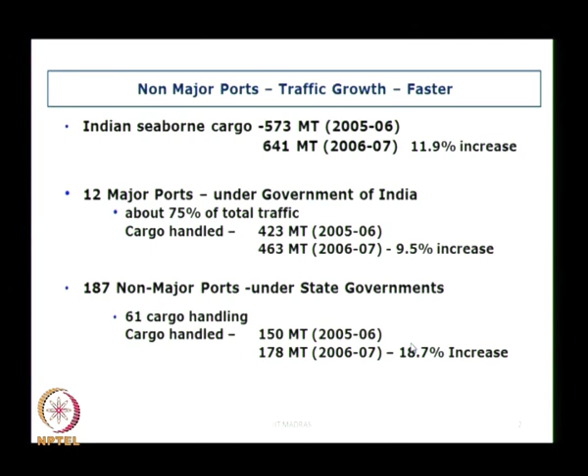and there the cargo is increased from 150 million tons to 178, that is about 18.7%. It is almost double that of the major ports. This trend is continuing. If you see the share of the maritime states, I said in the first class that there are about 9 maritime states.

There is no surprise that these 3 states, Gujarat, Maharashtra and Tamil Nadu, are the 3 major states that are handling the maximum cargo. If you see the living style of people in all these 3 states, they are much higher than other states. AP is fast catching up, they will come very close to Tamil Nadu. So these 4 major states are handling the maximum amount of cargo.

West Bengal is only 9%, Goa is 7%. Though Goa is a very small state, its handling capacity is comparable because of the location of Mormugao port as well as the hinterland it has. Karnataka 6%, Orissa 6%, others are about 3%. This is what it shows. I will be concentrating on Orissa just to give the reasons why it is not comparable.

The reason for Gujarat is obvious. We have 2 gulfs, Gulf of Kutch and Gulf of Cambay. The industrial policy of Gujarat government is also very good. Basically the Gujarat people are businessmen.

Anybody from Gujarat here? I do not expect anybody. I think most of you may be from Tamil Nadu and Andhra Pradesh because of the location of IIT Madras, but in Gujarat the people are businessmen, they may study MBA, not engineering.

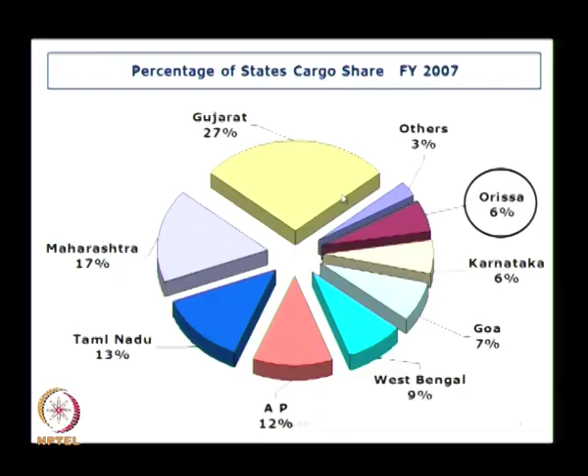So in these 9 maritime states we have, in financial year 2007, 663 million tons. The Ministry of Surface Transport, now the Ministry of Shipping, has forecast about 2000 million tons in 2017, but because of the economic recession this 2017 may go to 2020. From 663 in 2007, in 2011 we are handling very close to 1 billion tons, that is 1000 million tons.

Just like Goa, Orissa is also having rich mineral resources and is also now undergoing rapid industrialization. So it can expect about 1/6 of the national cargo, that means 15%, and we have about 480 kilometers of coast in Orissa. Tamil Nadu is about 600 or slightly more kilometers, but out of this only 50% is available for port development. The purpose of this slide is to show the advantage of a cluster of ports.

If you see Tamil Nadu, near Chennai we have 3 ports: one is Chennai, another is Ennore, the third one is L&T. There are some advantages of a cluster of ports, so we need to have a cluster of ports. We are suggesting about 3 clusters of ports. The advantage is the rail and road connectivity. If you have a cluster of ports, then the rail and road connectivity can be common for one cluster, so the development cost can be shared.

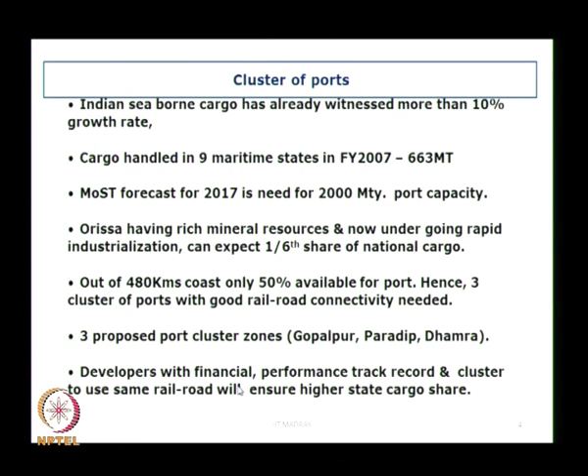So this is your Orissa coastline starting from very close to Andhra border. This place is called as Sonapur. It goes all along this; we call it as first cluster, Gopalpur cluster. We are calling this as Gopalpur cluster because already the approval has been obtained for Gopalpur, the construction is going on.

The next cluster is between these 2 locations, that is there is a river Devi coming here, from Devi to Dhamra. The third cluster is from Dhamra to, the coastline goes like this, where Chandipur is a place where we have this DRDO and other establishments using the sea coast. This portion is very calm area, is very good, not only in the Indian context, in the international context. It goes up to the West Bengal border.

These are the 3 stretches what we want to develop, and each stretch we are showing where the cargo is coming, and this shows the railway line. What you are seeing is the main railway line which goes all along the border.

This Gopalpur cluster, the details are given. What is the coastal length? 235 kilometers. There is an environmental restriction. This point is very important. Whenever we talk about port development, this environmental restriction is the one which governs whether a port can be developed or not.

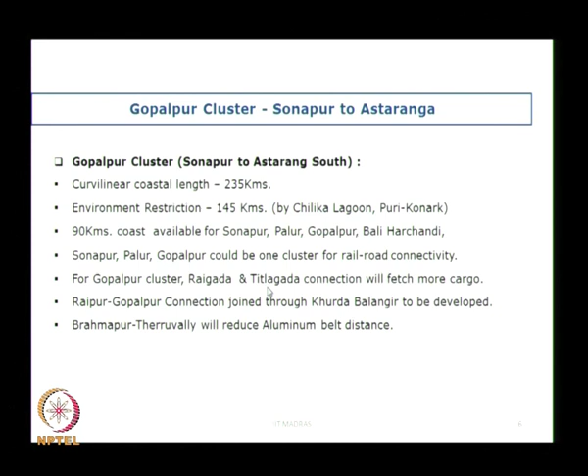Chilika lagoon is a wetland, so if we develop any port it will affect the coastal inlet. So out of 235 kilometers, 145 kilometers we cannot develop, only 90 kilometers can develop. Only 3 places we can develop, one is Sonapur, another is Palur, and the third one is Gopalpur. And this gives some details about the connection. I will not go into detail; unless you know the geography and the details, it is very difficult for you to understand.

There is a river called as Rushikulya river which is draining into the sea, and this is that stretch Sonapur up to this place called as Astarang, where there is a river Devi which is draining into this. So we are discussing about Puri, Puri is somewhere here, the Konark is somewhere here. So this area becomes really very sensitive, and I was talking about the Chilika lake. The length is around 60 kilometer, the maximum width is 20 kilometers. What you are seeing here, the blue color, this line is your Chilika lake. So this Chilika lagoon ecosystem we cannot develop.

Then we have olive ridley turtles that come and nest by the side of Rushikulya river, here also you cannot develop. So there are certain stretches, this should have been given in a red color, but this place and this place you cannot develop. There is one place in between this at a distance of more than 10 kilometers, Harichandi, where you can develop. Then we can develop a place called Palur. It is possible, but not very economical. Gopalpur already developed. The other potential location is Sonapur, which also can be used for development.

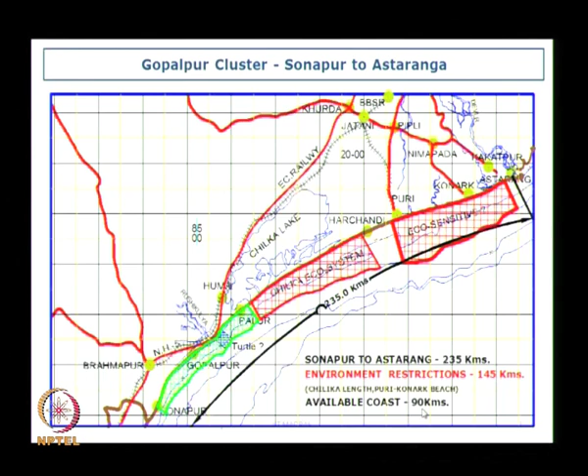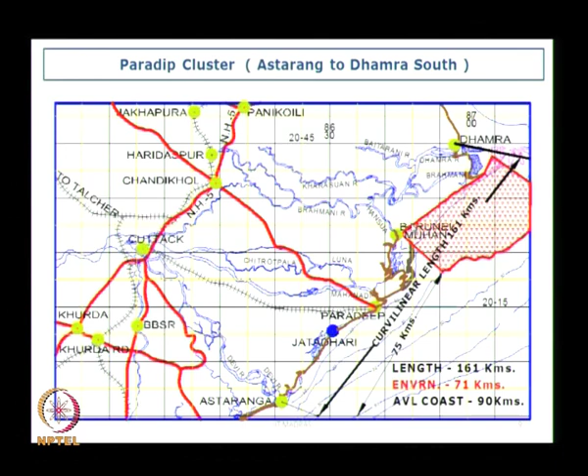Then we have this Paradip cluster. So, this area also is very sensitive area, so we cannot develop here, and we have a place called Dhamra where the river is draining. This area also is a very sensitive area for our Indian Navy. There are certain establishments where we cannot develop, so only Dhamra we can develop.

Then we have the other cluster. This is the Dhamra port, starting from Dhamra to West Bengal border. This is the third cluster where we have this portion shown here, which is your environmentally sensitive area. I am sorry, it is not environmental, it is defense. They have some restrictions. They are doing some operations here. They do not permit any commercial activity in this.

What you are seeing here, this red color is your 10 meter contour, this blue color is the 20 meter contour, and this is about 30 meter contour, and here we have developed the Dhamra port.

So, just below this defense restricted area there is a place called Chudamani where you can develop. North of this, where we have the river mouth, the Subarnarekha mouth, we can develop a port called Kirtania. There is one more port planned on the other side of the river. So, these are the three clusters.

The distance from Dhamra to Kirtania is 84 kilometers, out of which the defense restriction is 45, and the available coast is only 39 kilometers. This railway line, which is connecting to the main railway line, is being laid for the Dhamra port.

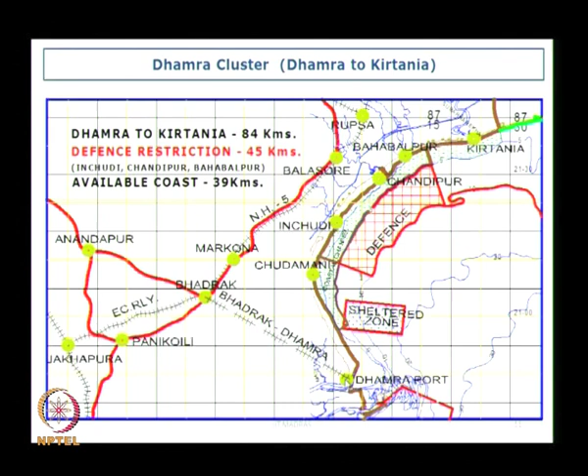So, what is the cargo share that has to come to Orissa? It is given as 2017, but we will make it 2020. You have to see this in context: in 2011 we had about 1 billion tons, and that will increase in another 9 or 10 years by another 1 billion tons. From independence in 1947 to 2011 we slowly increased to 1 billion tons. From 2011 to 2020 it may go to 2 billion tons.

This shows how fast the development will take place and what the requirements are for port industries. One of the spin-offs of any port development is hinterland development. When the hinterland develops it needs a port, and vice versa, when a port develops the hinterland also develops.

So, we have 1/6 of the share, about 330 million tons, that is to be given. Paradip is the biggest major port and Dhamra is the largest minor port of Orissa. With projection this may go to 160 million tons, and we need another 15 ports of 10 to 15 million tons capacity. At Chudamani they are planning about 10 million tons.

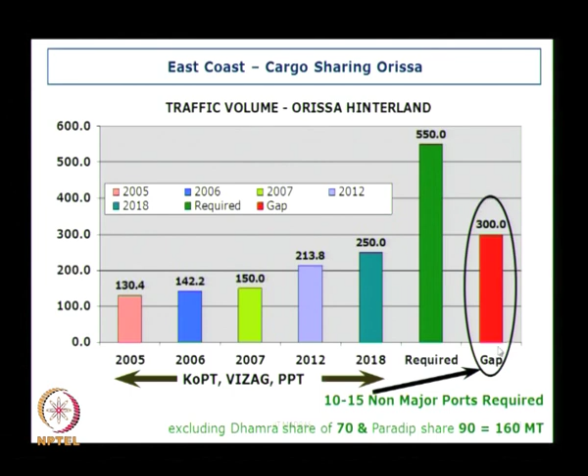So to sum up, we need about 300 million tons. The existing major ports are handling about 40-50 million tons, and it can go to 100 million tons. But the minor ports they want to develop in future cannot be of very small size; they have to be of considerable size, at least a minimum of 10 million tons handled by any port. That means about 10 to 15 ports should be developed.

So the state share has to increase from the current 6% to 16%; only then will Orissa state get developed. The ports are required to be developed on a priority basis. State development earlier was all based on agriculture and mineral resources, but today, in the context of imports, exports and globalization, port development is one of the vital parameters. Once the port develops, the state also develops.

We have a terminology called captive and non-captive port. A captive port is for an industry: the Birla Group wants to develop a port at Chudamani that they will use only for their industries; they will not handle cargo for others. Chennai port is a non-captive port in the public sector, so it handles cargo for many industries, whereas a captive port handles only its own industries. One captive port for Reliance is in Jamnagar, used only for the refineries.

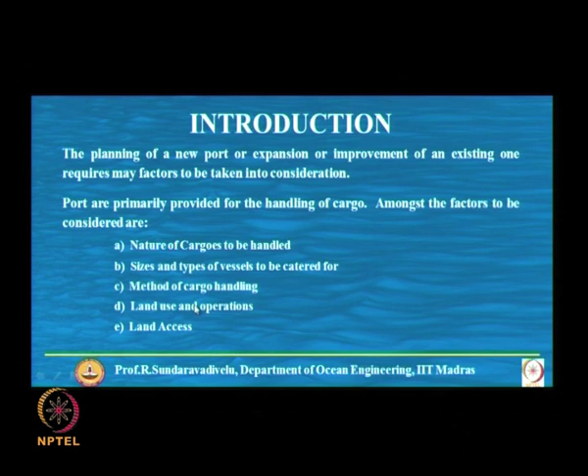So we are explaining the nature of cargoes. General cargoes are non-unitized cargoes, break bulk cargoes. Break bulk means steel, finished products. Unitized cargo means it can be in a container or things like that. Bulk cargoes, as we already told, can be dry cargo or wet cargo, that is liquid cargo. The handling method is different for different types of cargoes.

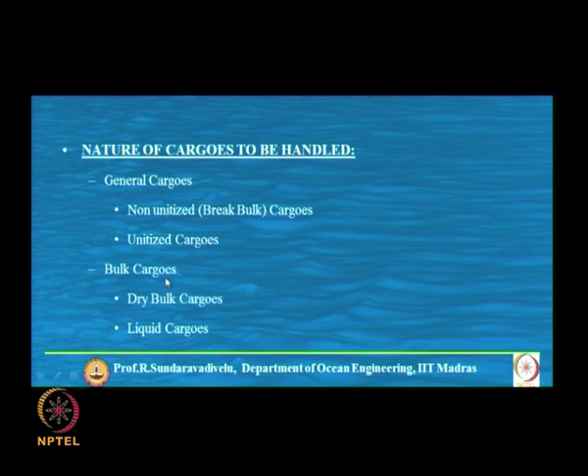The types of vessel you handle can be classified into 5 different types. General cargo vessel, container vessel. Roll on roll off vessel means at the end of the vessel you will have a ramp, used especially for taking cars. Then we have bulk cargo vessels where we transport iron ore and coal. Then we have tankers, clean and dirty cargo. Dirty cargo is crude oil and clean cargo is products.

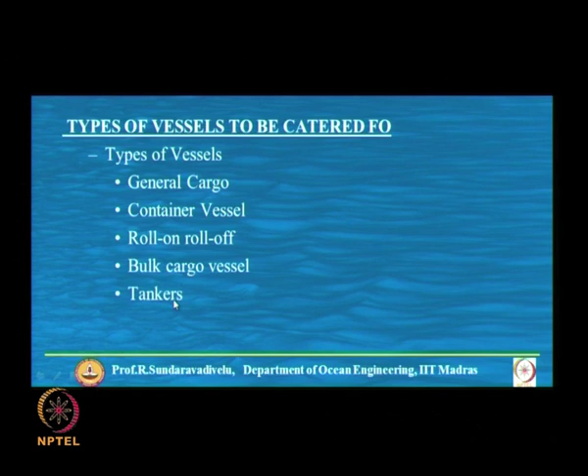One of the main features of this course is how to design the structures, whether a breakwater or a berthing structure, for which these vessel characteristics are very important. The layout of the ship, including locations and dimensions of the ramps and hatches. Hatches: last class I told about bulkheads. Each bulkhead is covered by a hatch cover. The location of the hatches is important.

The loaded and unloaded deck heights, that is the freeboard when loaded and unloaded, superstructure positions and clearances for dockside cranes. When it is completely unloaded, the ship will be above, so if it is rolling, it may hit the dockside crane. So the crane rail minimum specified in our code is 2.65 meters from the face of the berth. Only there can you have the rail for the crane.

Then we need to see the handling characteristics of the ship, how you handle the ship. For maneuvering, meaning stopping distance, going through the entrance channel, and turning operations, that is how you turn the vessel in the turning circle. Some ships nowadays have good maneuverability, even without tugs they can be maneuvered; otherwise we need a tug to maneuver the ship.

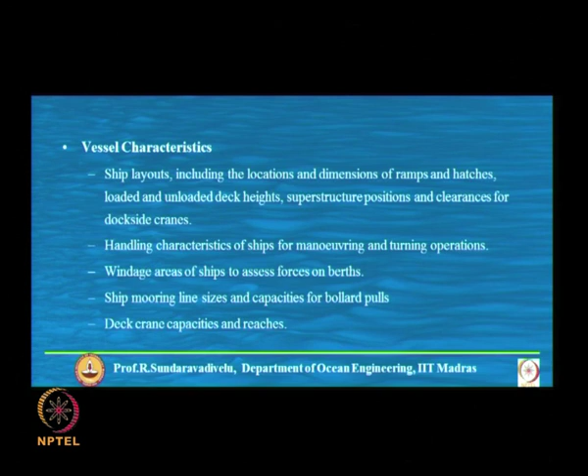The method of cargo handling. So the cargo handling depends on the nature of cargoes and the type of the vessels likely to use the port. The most important consideration is whether dockside cranes are required or whether ship's own lifting gear will be used for loading and unloading. So I said last class about the handy size and handy max which are having their own gear, so we do not need a dockside crane.

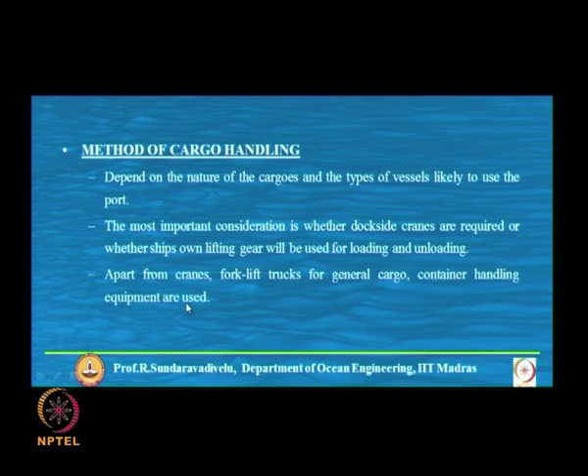These own lifting gear ships are very much important in the Indian context. All along the coast every 50 kilometer you can have a small berthing facility where the small ships with their own gear will come and load and unload the cargo. Apart from these cranes we need forklift trucks for general cargo, and container handling equipments are also used inside the storage area.

This land area is also important. It depends on the throughput of the cargo, how much land is required behind the berth, the type of cargo, the methods of cargo handling, and length of time cargo remains in the port. This length of time cargo remains in the port is very important. We do not want the cargo to be in the port for a very long period of time.

The container berth generally requires more land behind the berth to maximize the throughput. With the general cargo, part of the land will be utilized for transit sheds and warehousing. This is also important because general cargo, unlike container, cannot be immediately transported, so we need a transit shed as well as the warehousing. For container cargo, the land area can be open because containers give the cover against rain and sun, whereas for general cargo we have to provide transit shed and warehousing, that means a covered shed. But the container berth also needs some storage with sheds.

This is only for filling and emptying containers. When you have a container which has to be inspected by customs, or it is carrying cargo for 2-3 parties, then you have to do the filling and emptying. Only for that purpose we need these sheds, otherwise mostly it is open.

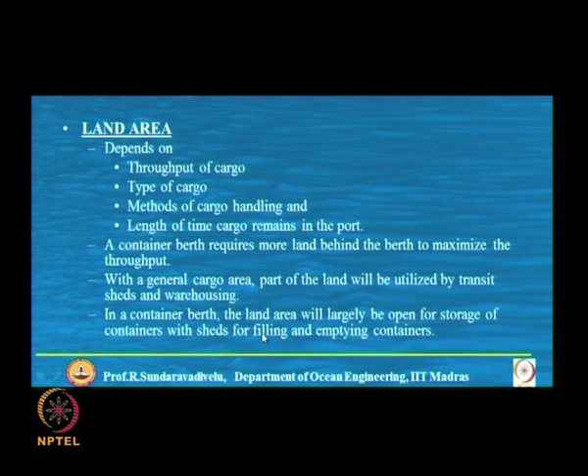Another important thing, which is creating a lot of problems for development of ports, is the access. This access can be by road, by rail or inland waterway. In case of liquid cargoes it can be by pipelines. These are the 4 modes of transport. In this context, the biggest port as on today is in China, Shanghai. They are handling containers, and they are using the water route for evacuating the containers. They have built a road bridge for about 40 kilometers into the sea.

For many years there was a port in Europe called Rotterdam. The Rotterdam port has the unique advantage of inland waterway, so it is a gateway to Europe. They use the inland waterway for evacuation of the port. Then Singapore has reached the top position from Rotterdam. One of the advantages of Singapore is that it is a transshipment terminal.

Transshipment means all the cargo required for India at one point of time was transshipped from Singapore, sometimes from Colombo also. That means the bigger vessels, mainline vessels, mainline meaning point to point, will go only to Singapore, and from Singapore it will be transshipped and come to India. That means the transport is through the waters.

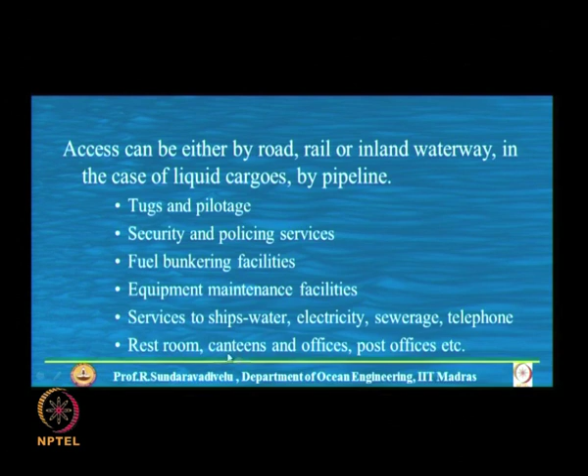Then it also needs some equipment maintenance facilities, both for ship maintenance as well as some workshops and things like that. Services to ships, that is water, electricity, sewerage, telephone, all these things can be given. Then many people will be working there; they need restrooms, canteens, offices, post offices, all these things are required. Any doubts in this?

How many of you have seen a code, IS code or any code? Which code have you seen? 456. Which year have you seen that? Last year also I was reading. Last year means after joining IIT? No sir, even when I was in UG we had to use that code. What about others? Anybody has seen any code? Which code have you seen? IRS. Anybody else? IS 800. What is that IS 800 code? Provision of steel. Steel code. When was it revised? 2007. Anyone else?

Civil engineering students, you have not seen IS 456 in BTech Civil Engineering? You listened in the class or you have seen the code? We have seen it. What is your name? Shivakami Sundari. Where did you see the code? Hard copy or soft copy? I'm having a hard copy. Hard copy. Where is the soft copy available? Central lab. So you can load it. I will check the code. I will discuss the code in the next class.

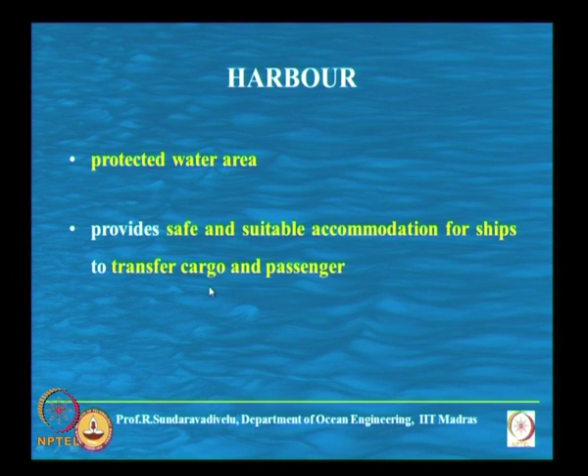Now we will move on to lecture number 4, that is about the planning of harbor. We have discussed this. Harbor is a protected water area. This provides safe and suitable accommodation for ships to transfer cargo as well as passengers. When you talk about harbor, there are different types of classifications. What is the advantage of listing different types of classification? This is better for your understanding. So we can call the harbor a natural harbor, artificial harbor or semi-artificial harbor.

Can you tell me which is the natural harbor in India? Cochin. Artificial harbor? Semi-artificial? Best example is Goa. Vizag also can be classified; the inner harbor is natural and the outer harbor is artificial. Then depending on the usage we can classify whether it is commercial, fishery or navy. Commercial is all the major and non-major ports we are discussing. Fishery means adjacent to every port we have a fishery harbor, and we have many minor fisheries harbors also.

Which state will be having the maximum number of fishery harbors? Can you guess? No one from Kerala here? Kerala is having many fisheries. Gujarat is also having, but people in Gujarat don't eat fish; they are mostly vegetarians. How many are from Kerala here? I think all of them eat fish in Kerala. They export also. Tamil Nadu also has, but not like Kerala.

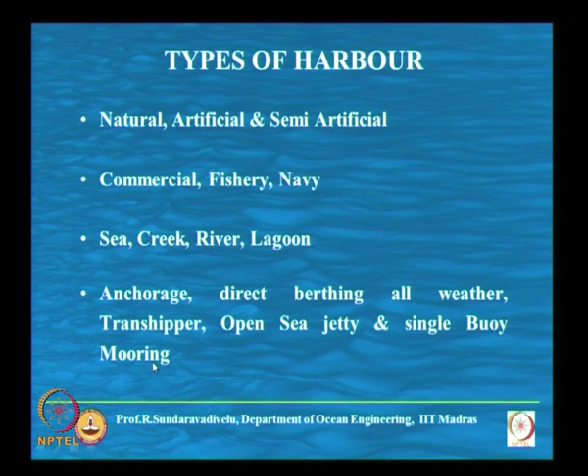Then we have the single buoy mooring system. In Gujarat, in the Gulf of Kutch, as a part of Kandla port, we have a single buoy mooring in Wadinar. It handles about 30 million tons, one single buoy. So it is the most economical system of handling. I think in India we have about 12 single buoy mooring systems as of today; these are using VLCCs. So these are the different types of harbours.

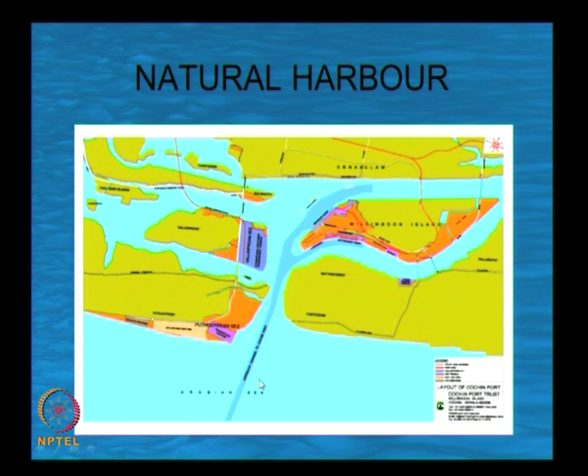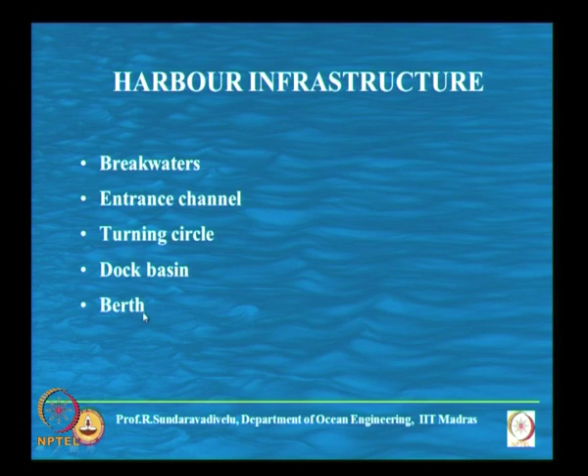What is the function of a breakwater? The function of a breakwater is to protect the harbour against wave action. Any waves, when they come inside, will damage the vessel or structure and create a lot of problems. So we have to protect the harbour from wave action. Then we have to reduce the intensity of wave action as well as the coastal erosion. These two are different. Protect the harbour means in a cyclone it should not permit more waves. In a normal operating condition it will reduce the wave.

For example, severe wave during cyclone can be of the order of about 9 to 10 meters in Chennai. That time no vessel will be inside, they will take the vessel outside, but inside a lot of infrastructure is there that should not be damaged. And the intensity of wave action should be reduced to 1/10 of the waves acting outside. Normally it is about a meter or 2, so at that time you have to reduce. Then the coastal erosion due to the waves, that also should be reduced.

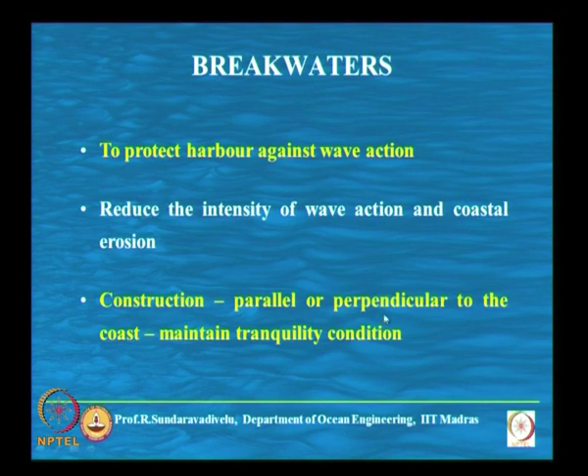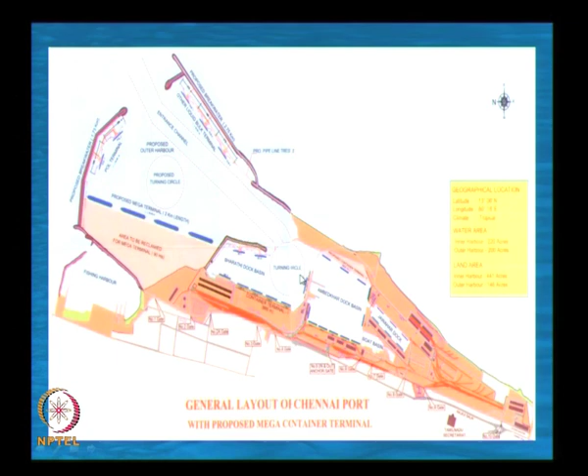These breakwaters can be either parallel to the coast or perpendicular to the coast to maintain tranquility condition. So if you see this Chennai breakwater, if we take this as the shoreline, this breakwater is perpendicular to the shoreline, this breakwater is parallel to the shoreline. We have many types of breakwaters, we will discuss them separately in 2 lectures about breakwaters.

The entrance channel, so entrance channel is like a roadway marking, there should be waterways in proper configuration and these are to be designed for good control and safe maneuverability of the ship. When you are bringing the ship inside, there should be sufficient width and depth of the channel so that you can bring the ship under all conditions. Conditions means winds, currents, waves, visibility as well as adverse weather condition, not during cyclone, but in the non-cyclone period of about 300 days, whatever adverse condition is there you should be able to bring it. Visibility is also important, just like air navigation.

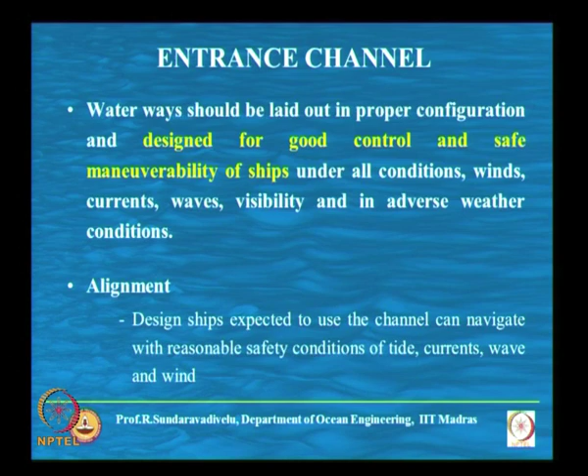Alignment, this alignment is important for the entrance channel. The design ship expected to use the channel can navigate with reasonable safety under conditions of tide, currents, wave and wind. For example, to make it very simple, we have different conditions for the ship related to current, wind and wave. It is called head sea, beam sea and quarter sea, that I will discuss later. Head sea means the direction of all these parameters is perpendicular to the width of the ship, that is the beam of the ship, where the area is less. If it is perpendicular to the length of the ship, that is called the beam sea, which is undesirable because the exposed area is more.

The types of channel, I will show what is open channel, semi restricted and fully restricted. There is a figure in the IS code that I will be discussing later. The width of the channel depends on whether it is open, which means it is more than 7 times the beam of the vessel, about 10 times the beam of the vessel. If it is single lane traffic, you can go for 3 times. Double lane means one ship can go in and one ship can come out, that time we need more than 3.

The depth of the channel depends on the size, means length of the ship, as well as draft, which is the main parameter. Size means length and beam, it also governs because we have the rolling and pitching of the vessel, depending on the length and beam of the vessel. Draft means the portion of the ship which is below the water line. This is important: under keel clearance, number of lanes, single lane or double lane, type of channel, I will explain with a figure in one of the classes. The type of channel is open, semi restricted and fully restricted. Wind and wave action and dredging etc. And it also depends on the type of seabed.

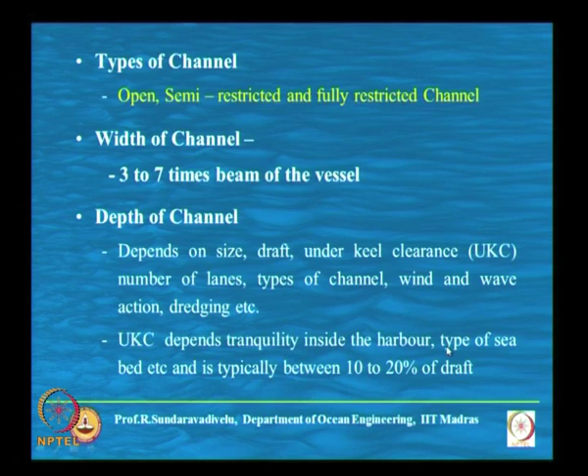UKC depends on tranquility inside the harbor, type of seabed etc. And this is typically between 10 to 20% of the draft, that is the under keel clearance, depending on the tranquility, that is the wave action inside the harbor, and type of seabed. If it is a rocky seabed, under keel clearance should be more. If it is a clayey seabed, under keel clearance can be less. Clay means about 0.3 meter, rock means about 0.6 to 1 meter, because when the ship hits the bottom, if it is clay there cannot be much damage, if it is rock there can be severe damage, typically between 10 to 20% of the draft.